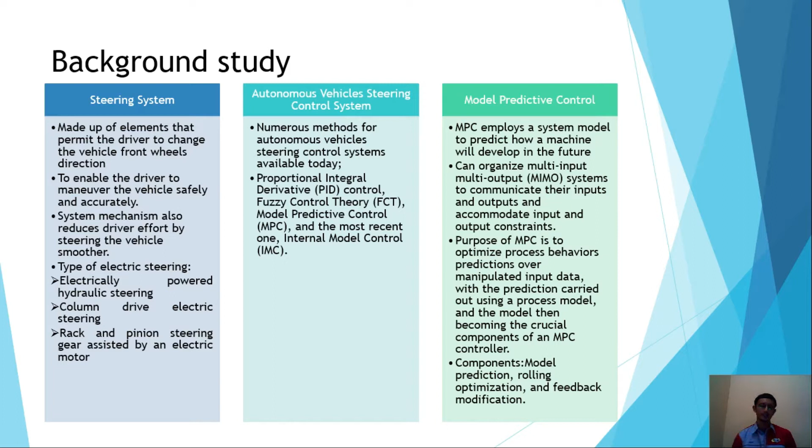The purpose of MPC is to optimize process behavior prediction over manipulated input data, and the prediction is carried out using a process model, so the model becomes the crucial component of an MPC controller. The major components in MPC are model prediction, rolling optimization, and feedback modification.

All of the accidents mentioned before could gradually eliminate risk by using an autonomous vehicle steering system. Since the system is related to the steering system, it becomes a multi-input and multi-output system.

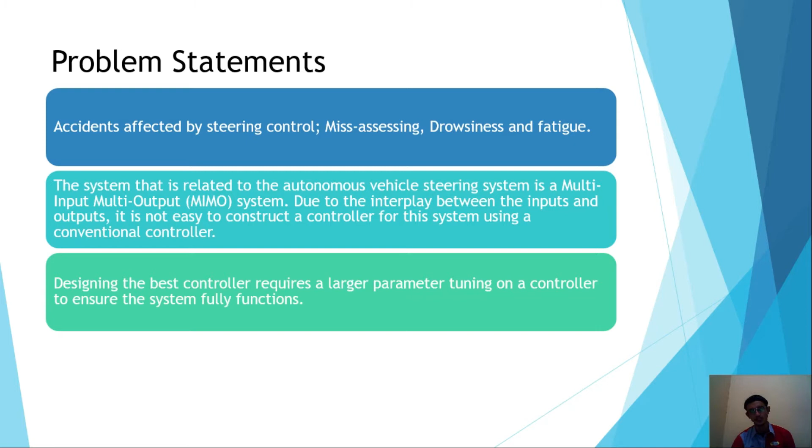Due to the interplay between the input and output, it's not easy to construct the controller for this system using a conventional controller. But by using the MPC controller, we can overcome this problem, because MPC is a multi-variable control system. Lastly, designing the best controller requires larger parameter tuning on a controller to ensure the system fully functions.

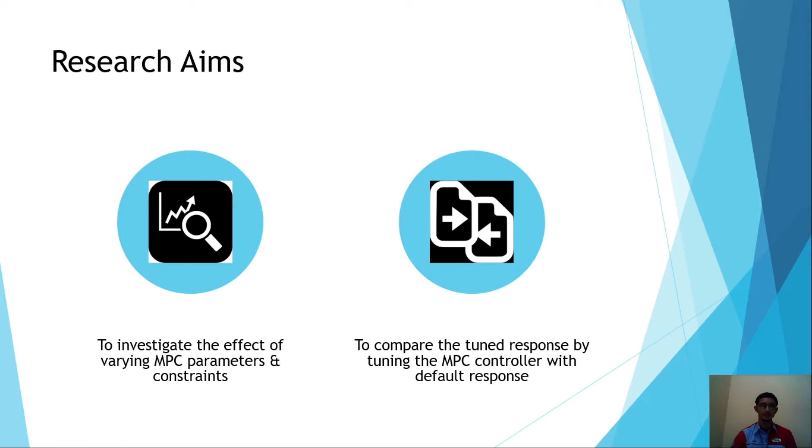For the research aim, we only have two objectives. The first one is to investigate the effect of varying MPC parameters such as sample time, prediction horizon, and control horizon. For the constraints, we have steering angle and steering angle changing rate. The second objective is to compare the tuned response of the MPC controller with the default response by the previous researcher from the journal.

In this project, we only focus on investigating the effect of varying the MPC controller parameters I mentioned before, which are prediction horizon, control horizon, and sample time. Next, we only use a linear controller system, which is constant longitudinal, for an autonomous steering system controller model. Lastly, we only study 3 MPC parameters, like I mentioned before.

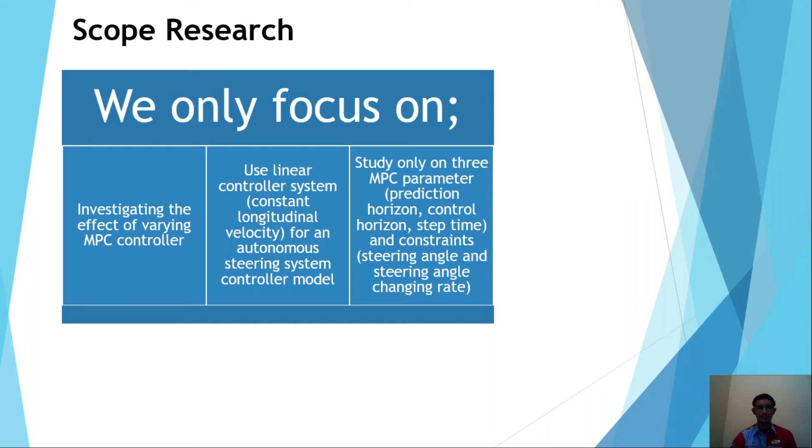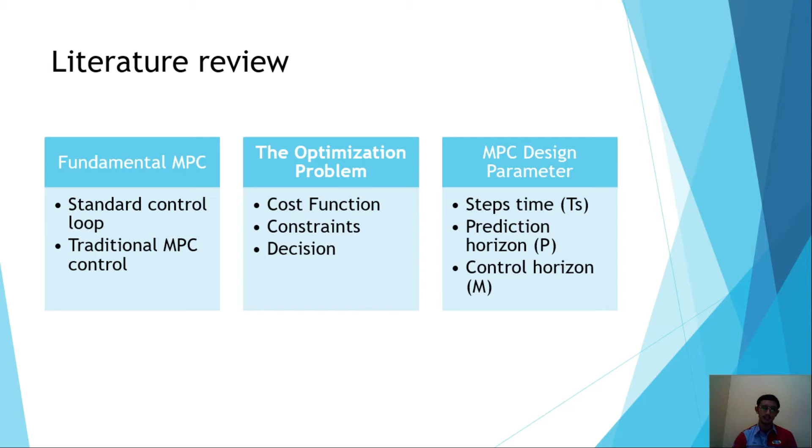For the literature review, we have the fundamentals of MPC, the optimization problem, and the design parameters. For the fundamentals of MPC, in the first figure, we have a standard control loop. In the control problem, the goal of the controller is to calculate the input variable to the plant so the plant responds in a way that makes its output track the reference output.

Traditional MPC control uses a future prediction strategy to calculate the output and to ensure that the output of the plant follows the target reference output, and the MPC controller uses what is called an optimizer.

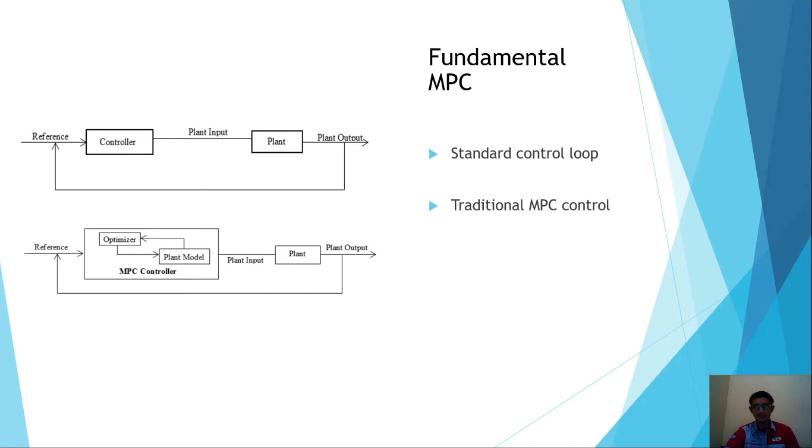This prediction strategy is based on the use of the plant model, which we call a car model, by the MPC controller to simulate the car path in the next P time steps, where P is the prediction horizon, which represents how far the MPC controller looks forward in the future to make the prediction. Next, the optimization problem.

The MPC controller solves an optimization problem at each control interval, which is a quadratic problem. Specifically, the following are part of the optimization problem. The first one is the cost function. The cost function is also known as the objective function because it measures the controller performance to decrease it. Next is constraints.

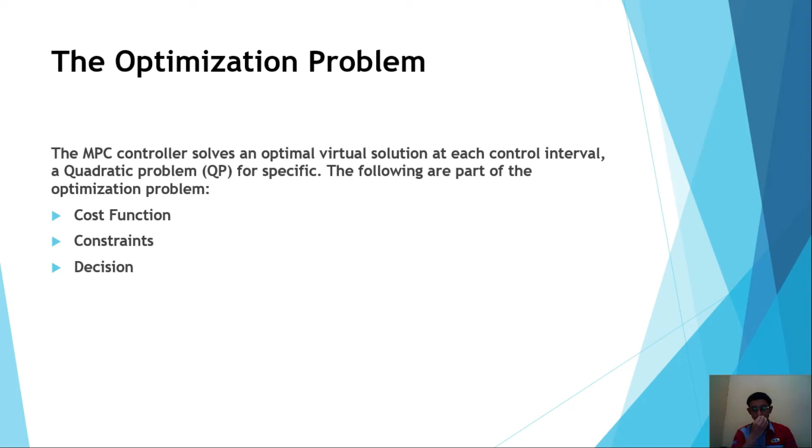Constraints define the soft and hard limits that must be fulfilled for the system requirements to be met, including the physical bounds. And the last one is decision. Decision is meant to modify the controller variables to minimize the cost function and meet the constraints. Okay,

another part is we move to the methodology. We start by designing an MPC model for the autonomous steering system, where we create a custom reference trajectory using the Driving Scenario Designer toolbox. The next one is tuning the MPC controller parameters like I mentioned before. We change the 3 parameters inside the MPC controller, which are the sample time, prediction horizon, and control horizon.

For the constraints, we tune the values of steering angle and steering angle changing rate. After tuning the MPC controller, we evaluate the tuning response from the MPC controller. If we get a satisfactory value from that graph, we move to compare the default response with the tuning response for lateral position and yaw angle. If not, we tune the MPC controller again until we get a satisfactory result.

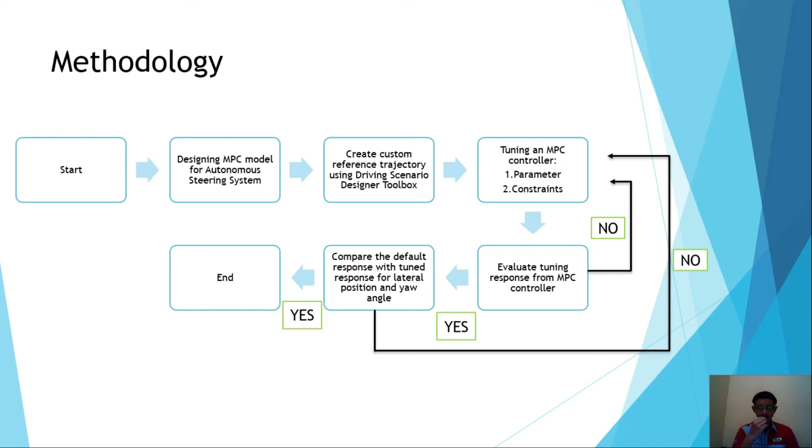Okay, after evaluating the tuning, we move to the comparison with the default response. Like I mentioned before, our first objective is to evaluate the tuning response. So in the evaluate tuning part, we meet objective one. And the other objective is to compare the default response with the tuning response for the lateral position and yaw angle. Okay, this is for objective 2.

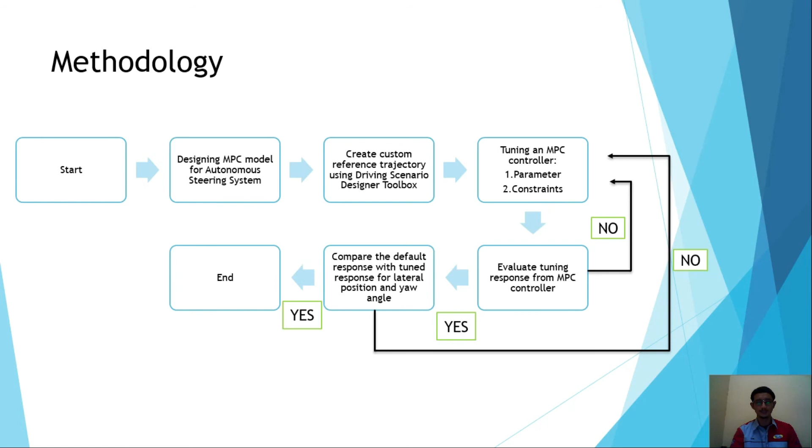Then after we get a comparison between these two, lateral position and yaw angle, we reach the end of the project methodology. Okay, this is our MPC model for an autonomous steering system. We start with the reference that I mentioned before. The reference is a custom reference trajectory that we made from the scenario toolbox.

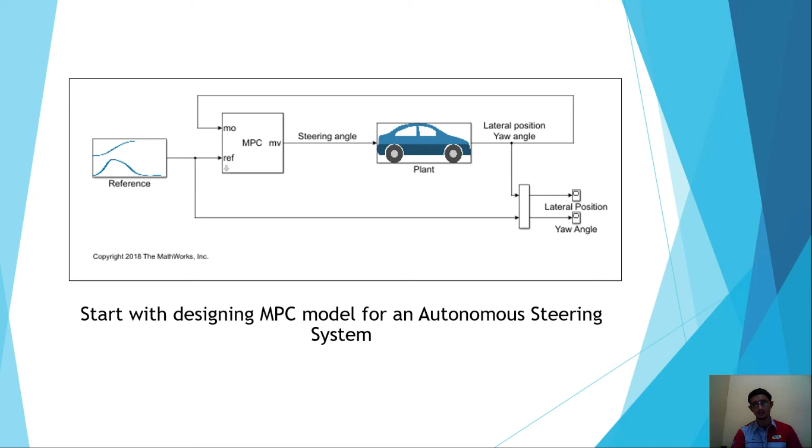Okay, then we move to the MPC controller. Inside the MPC controller, we have multiple outputs; in this case, we have two outputs, which are lateral position and yaw angle, so that it can calculate the output. Then from the MPC, we have a steering angle, so we move to the plant, which is the car model. Then the car model gives two outputs, like I mentioned before, lateral position and yaw angle. Okay.

Next, we move to the constraint parameters. For the steering angle, we put -2 and 6 radian, and for the steering angle changing rate, -0.2 and 0.2 radian.

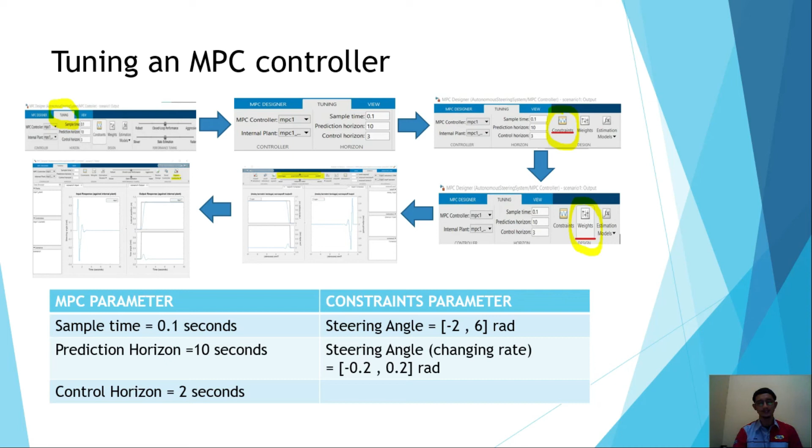Okay, this part shows how I evaluate and compare the default response with the tuning response for the lateral position and the yaw angle. As you can see here, these two scopes represent the graphs that I need to investigate and compare. So after I run the system, I can extract the graphs from these two scopes.

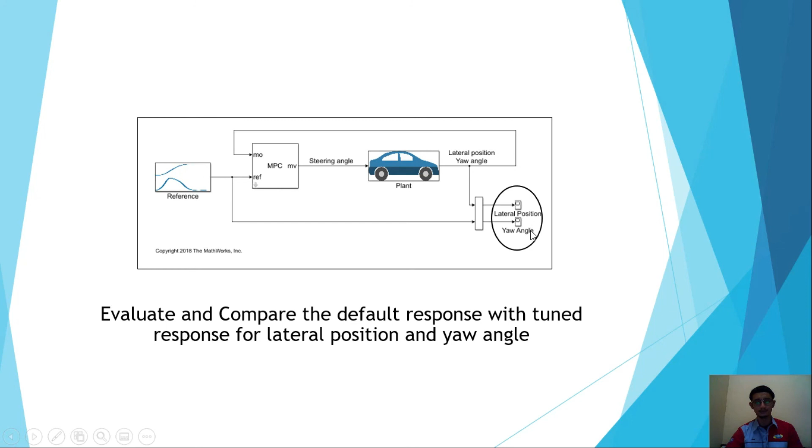So for this result, changing the prediction horizon is to find the optimized trade-off between size of matrix and computational load, and for the control horizon, it is to find the optimized trade-off between system dexterity, which is reacting quickly to variations, and computational load. For further research, I will address objective 1 and objective 2. This is only the preliminary result for this proposal.